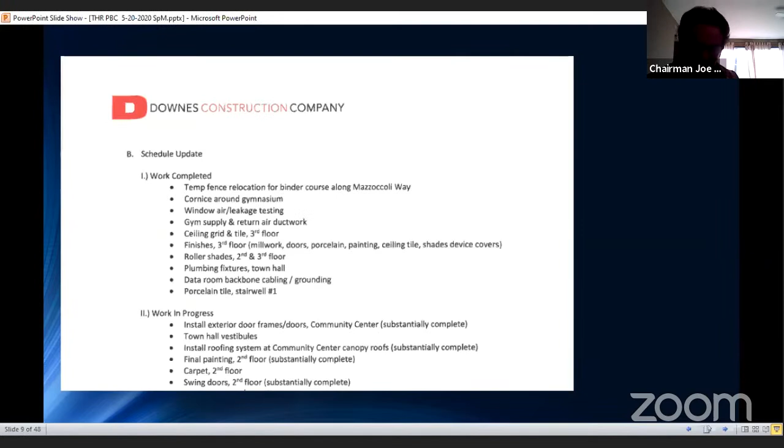Okay, we'll run down the schedule update. A lot of progress has been made. I know it seemed like it took what seemed like an eternity to come out of the ground. Now that we're into the finishes aspect of the project, we're moving pretty quick.

So I'll go through the work completed. I'm really just touching on some of the highlights of work completed since our last meeting, starting with the fence relocation along the east side of the project. We relocated the fence to the other side of the sidewalk, closer to the library. That enables us to do the prep work along Mazzoccoli Way.

The crown molding or cornice, we've installed those pieces around the perimeter of the gym. We were buttoning that work up the last time we met. Now that we have windows installed, we've done the air and leakage testing on the windows. The supply and return ductwork that feeds the gymnasium, the duct sock that is the supply is installed now, and so is the hard ducted return ductwork. That unit has been started up as well.

Now working top down inside the town hall in terms of the final finishes for the project. We're really approaching this starting now at the 3rd floor of the town hall, working our way down and then through the community center to finish off finishes.

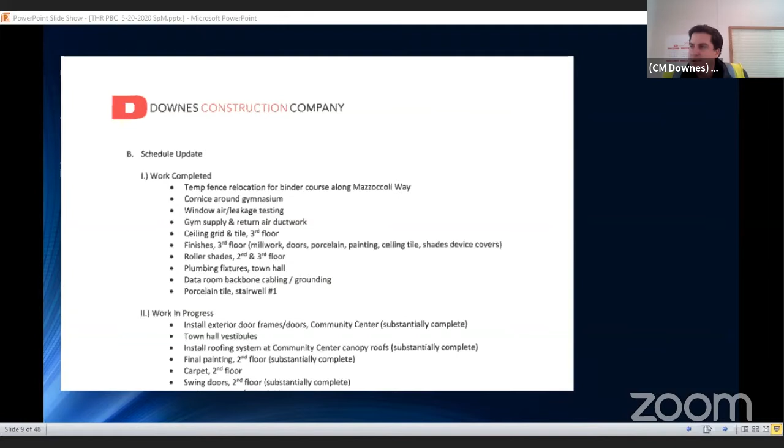Porcelain tile. We also have porcelain tile within the lobby of the town hall on the 2nd floor. We're actually installing that now. You'll see that in one of the photos.

The cab construction, that's a work in progress. Schindler is actively working on the cab. They're probably going to be working on that for the next few weeks.

The ductwork in terms of the HVAC system and doing final terminations of HVAC on the 1st floor, we're substantially complete within the town hall. And we've got a lot of the above ceiling HVAC roughed in within the community center.

Within the Grand Hall, there's a metal panel ceiling system, and we've started the installation of that. We have all the light fixtures energized within the Grand Hall. We have some of the metal panels installed. We're waiting for more metal panels to show up. We're probably a week away from seeing the rest of that material. That's a work in progress.

Drywall and taping in the community center. We are essentially completed with drywall and taping in the Transition Academy and the daycare. We're on our second coat of taping within the administration area of Parks and Rec, and we're now making the corner. We have drywall pretty much all the way down, from the Parks and Rec kitchen all the way down to the multi-purpose rooms. And we're almost to the top of the ceiling with sheetrock and taping within the art room. They're going to be wrapping up sheetrock and taping this week to finish that off.

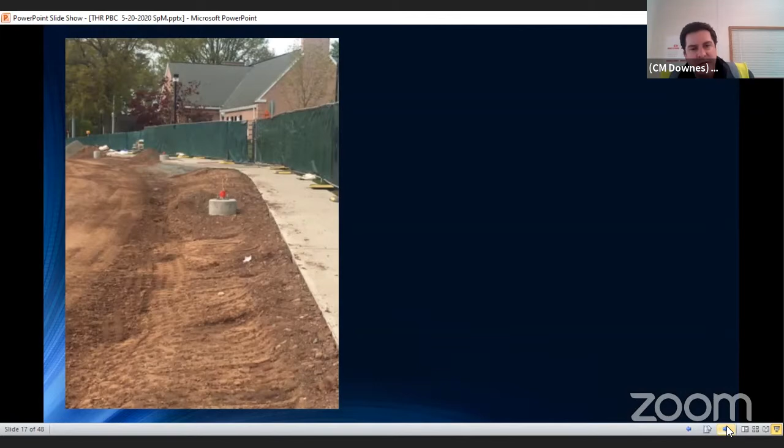Okay, next one. This is a shot looking down Mazzoccoli Way towards Cedar Street. You can see the fence relocation I mentioned earlier, moving it closer to the library, and one of the light pole bases we've already set. This was last week, so if you looked at it today you'd see a lot of progress as we prepare for binder course next week.

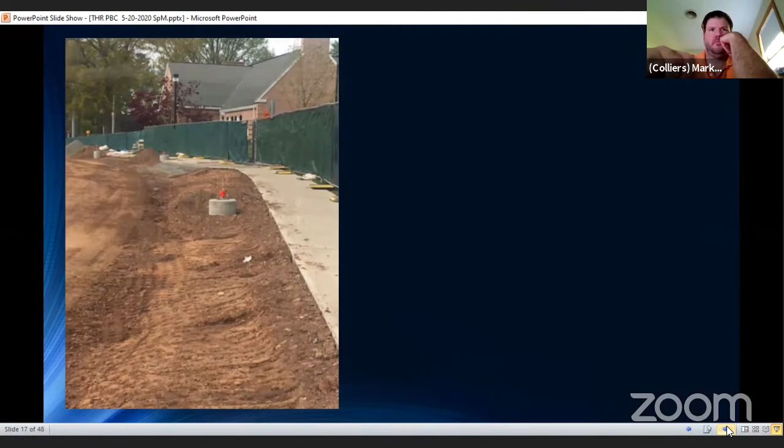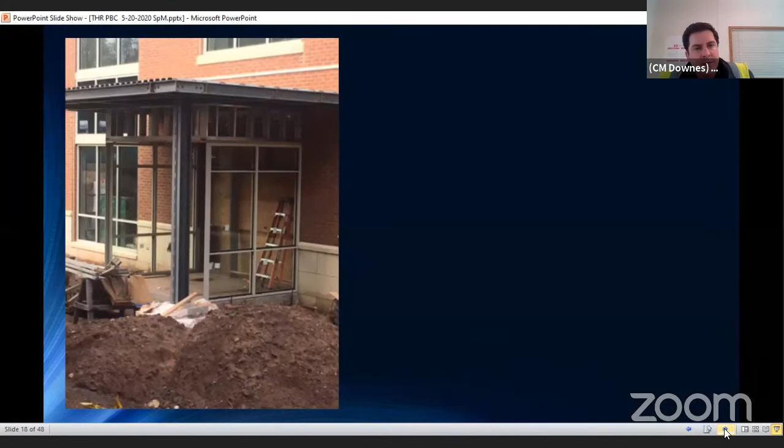All right, that's a close-up of one of the entries along the town hall. We're building out the little vestibules—this is typical on both sides of the town hall. It gets an aluminum storefront entry system, and we'll have a set of double doors on the front. The guys are actually setting these openings now, doing that this week to get it buttoned up.

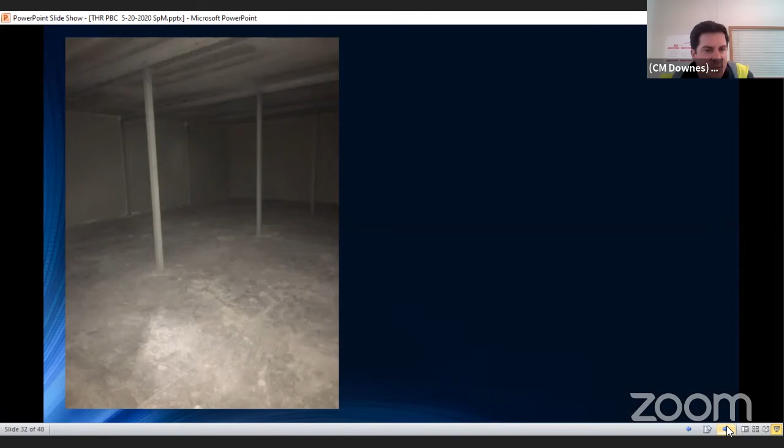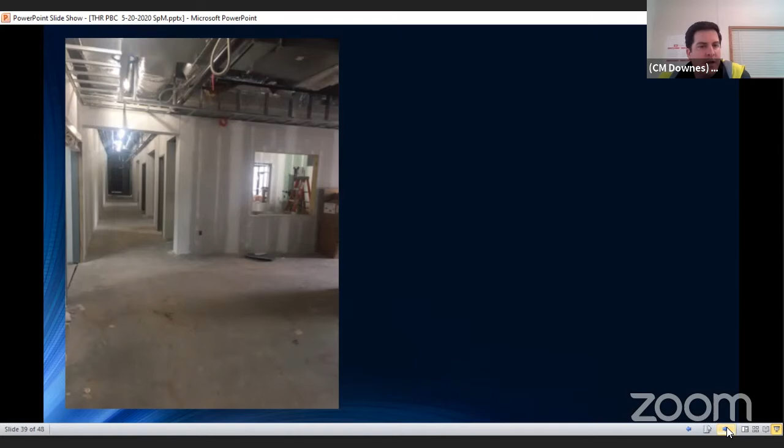And now we're still in the community center in the other corridor going around the corner. We're now on the south side. So the rooms off to the right include the Parks and Rec kitchen, and then beyond that is the multi-purpose rooms. And beyond that, at the end of this hallway is the art room.

Okay, thank you, Frank. We'll now go to a presentation on landscaping and planting layout for the new facility. Chris?

Hey, Joe, can you hear me? Are you there, Chris? Can you hear me? Yes. Yes, okay, good. Which one do you want to start with, Chris? Let's go with the, I think there is a landscape plan that's not colored in. Okay, give me a second. So that'll be the planting plan? Yes. Okay.

The public's edification is a presentation by Quisenberry Arcari, the architectural firm on the job, and they're going to go through the presentation on landscaping and plant layout.

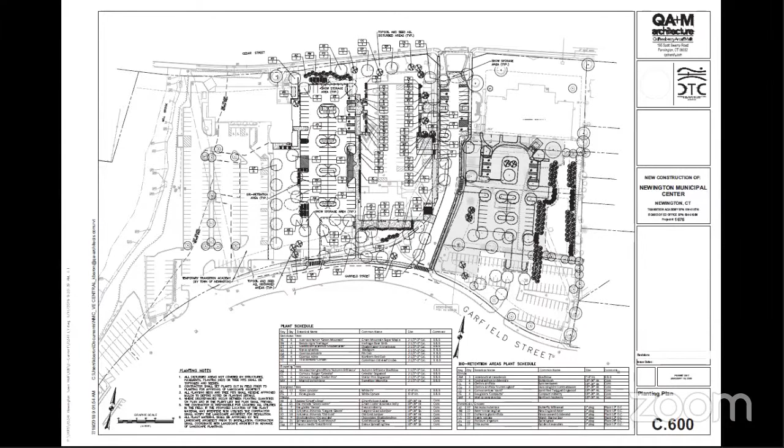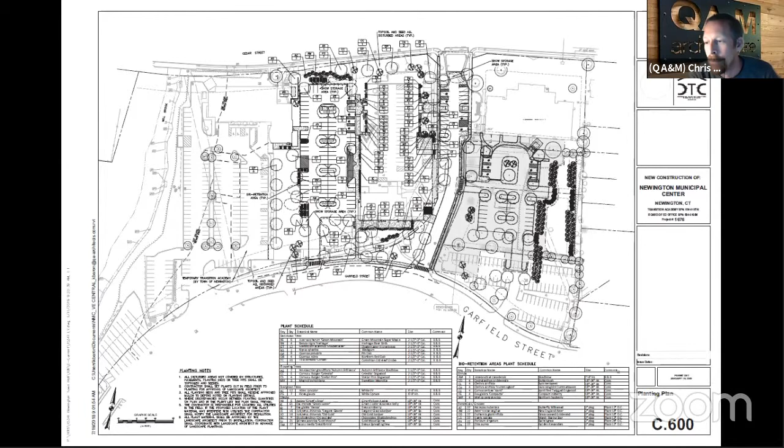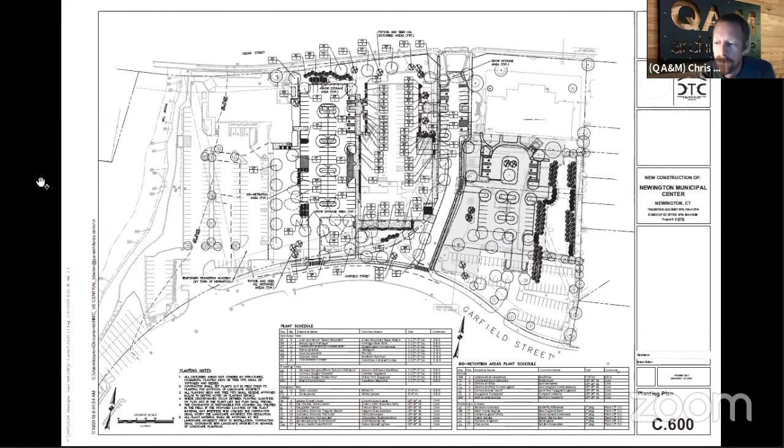Okay, what you're looking at right now is the contract planting plan for the overall site that includes the parking lot, the building proper for the new town hall, and the library portion of the job that was previously done. So you're seeing the overall campus here on this plan. And then if you zoom in on the text at the bottom, there is some plant schedule information there - you can see what type of plants there are, and it all has a key tag to it. If you're looking at the left side of your schedule, the key tag is 2 letters typically, and it identifies each of the plants that are on site, so you can identify which plant is which on the plan.

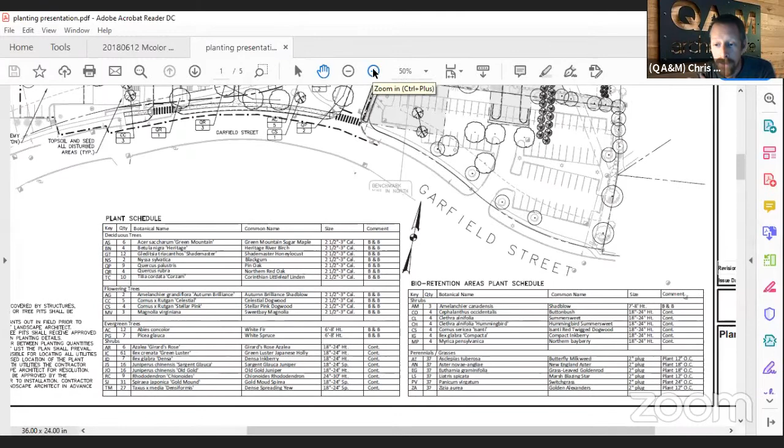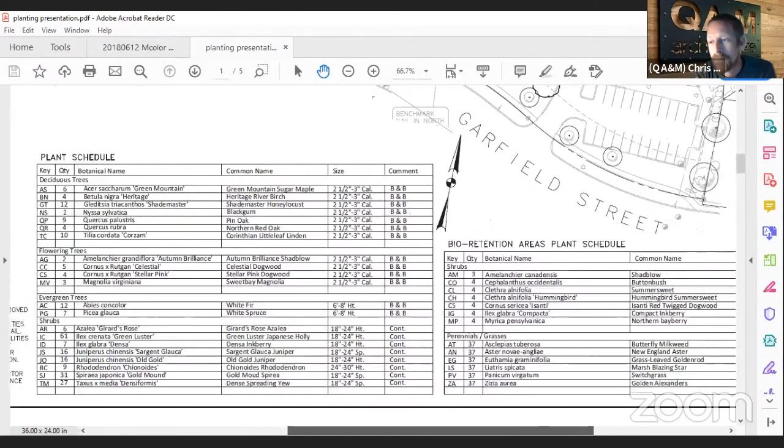So this is the plan that Downs is following currently. There have been no real changes to this based on anything to do with the property line or the gym bump out. So the original contract plan is still in place for the site plantings.

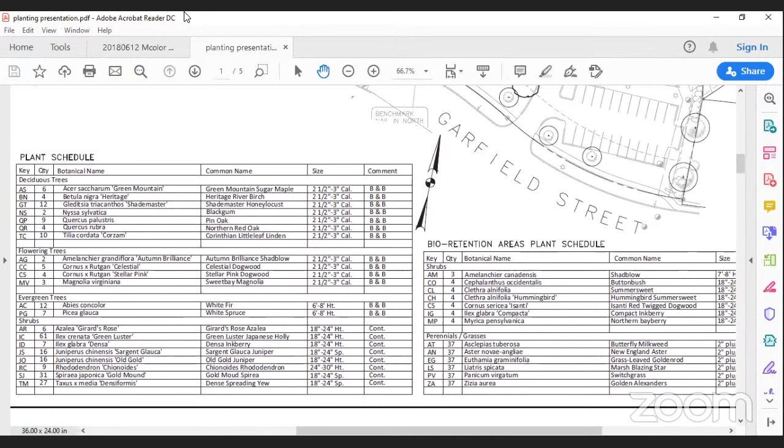So if you go to the next plan, this is a closer look at just the building itself, showing the surroundings of the building as to what plants are which. Again, there's a plant schedule on your left. There's no tags on this plan, just to keep it a little cleaner and give you more of a defined view of the count of plants and where they are. So you can reference this sheet and the previous sheet if you want more information on exactly which plant is there.

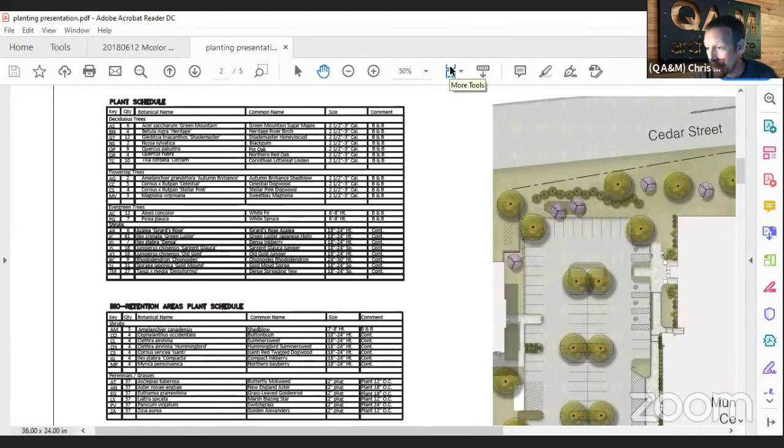Generally, the larger circles are your trees, which you'll see in the following slides. We'll show you some of the tree options in various places on site. The smaller purple items indicated are flowering trees, and you'll see which trees those are in the images on the next few slides.

As you get a little closer to the building, we have smaller shrubs and flowering plants that are lower, and those will be on the next slides as well. So that's the general overall view of the plantings. You've all seen a similar presentation early on, so this shouldn't be new information, just a little cleaner hopefully.

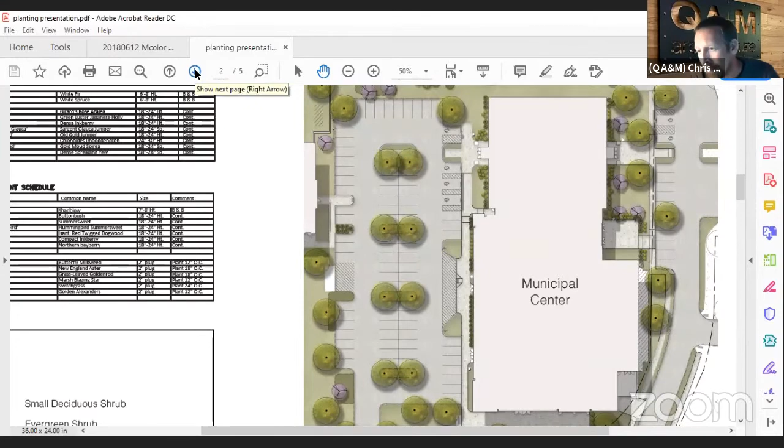The next three pages will give you the actual image of each individual plant type and their corresponding key tags. So if you go back through the first plan, you'll see a 2-letter tag pointing to each individual plant and a count of those plants, so you can identify what plant is where, to get a more defined view of what these plants will look like once established.

So we started with the trees, then went to larger plantings, and then down to the smaller flower plants on the second and third page of these planting images. That's a general overview of the planting plan. Like I said, no real changes overall to the plan since its inception at the beginning—we're just showing a more defined plan of what's going in there for your information.

Are there any questions of Chris?

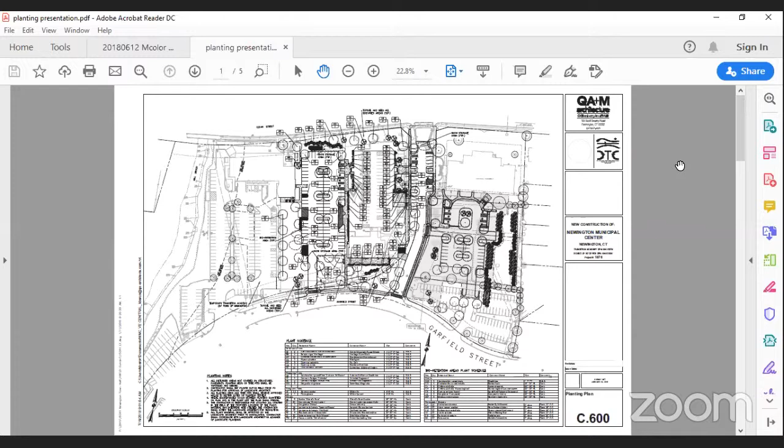Joe Harpy: in terms of what we're looking at right now, when the landscape architect came in many months ago with Mr. Arcari, I thought there was some design, and perhaps when we did the revised property line, there isn't any room now with the retaining wall etc. Was there or was there not some public gathering area designed in front of the new town hall, as you look at it from the library across, looking west?

At some point there was a plaza area at the south end of the building, kind of like an amphitheater layout. I think with the revision of the property line, that portion had gone away based on value engineering and the property line layout. Is that what you're referring to? Yes—where it was, right south of those three meeting rooms? Yes.

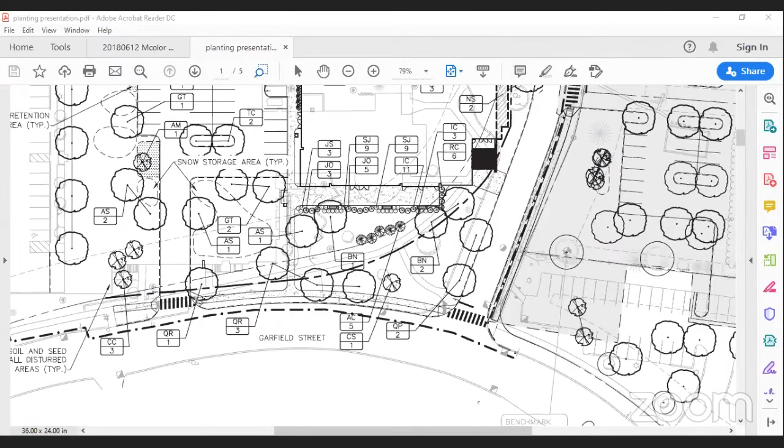Okay, and this design that we're looking at, does that account for the settled width of Mazzoccoli Way? Currently, if you look at your screen, there are two trees on the left side of Mazzoccoli Way. Those trees are technically in the right of way, I believe, for Mazzicoli, but I don't think they'll be impacted if there's a desire to widen that roadway and open up Mazzicoli. As you remember, the sidewalk runs down along that side as well.

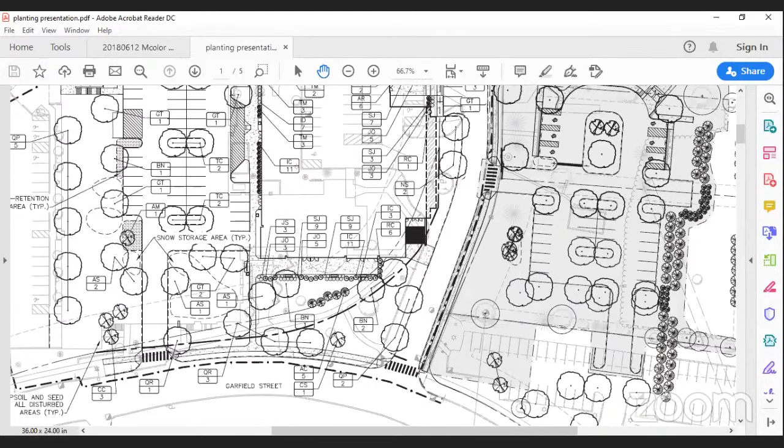If you go to the colored plan, it shows the sidewalk that got added as part of the 824. So you'll see that sidewalk. Those trees may have been shifted on this plan a little to the west to get it off the sidewalk, but the intent is that the sidewalk remains as part of the Mazzoccoli Way right-of-way if that ever does open. So those trees should be able to remain in place.

Okay, thank you. Are there any questions from the committee? Joe, if I could real quick.

Yes, Mr. Minor. Chris, on the final—that south end gathering area that was originally scoped with a retaining wall and a bit more of a patio area—that's all now sloped and going to be grass all the way down to the sidewalk on the exterior of the building, correct?

Correct. Yeah, it still has the ability out there to have seating on the lawn area for a presentation on the concrete sidewalk, if that was desired, correct?

Yeah, and what you're not seeing on this too, Chris, is it's kind of like a bowl shape there, because you're going from the higher elevation, continuing around and stepping down to the lower elevation of the lower level of the town hall. So there's kind of a bowl shape there in the grading. I don't know how steep it will be at final grading, but it will make a little lawn area that's sloped toward the concrete patio.

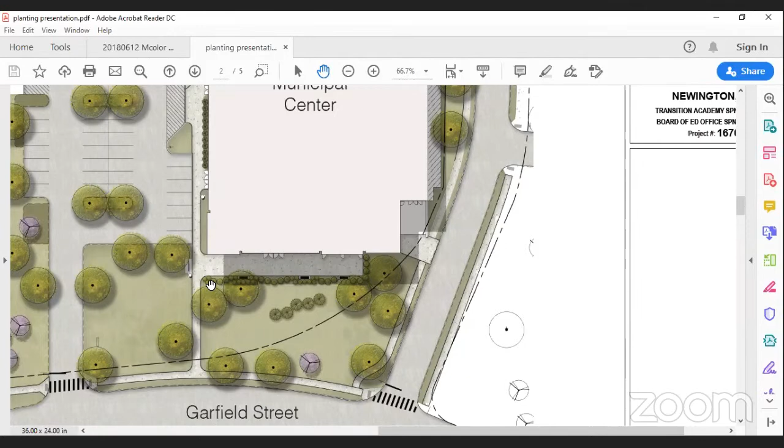The other plantings south of that little grouping, near the slope area where you may be able to sit, seem to be encroaching on the sidewalk. Is that the proposed extension of the existing sidewalk? Right. I'll take a look at what exact plants are in there and what their heights are, and if they look like they might interfere, I think we should look at relocating or removing them from the scope.

Are there any questions? Chris, Mr. Chairman, Mr. Boutot has a question. Yes, please go ahead. Joe Paul Boutot from IT.

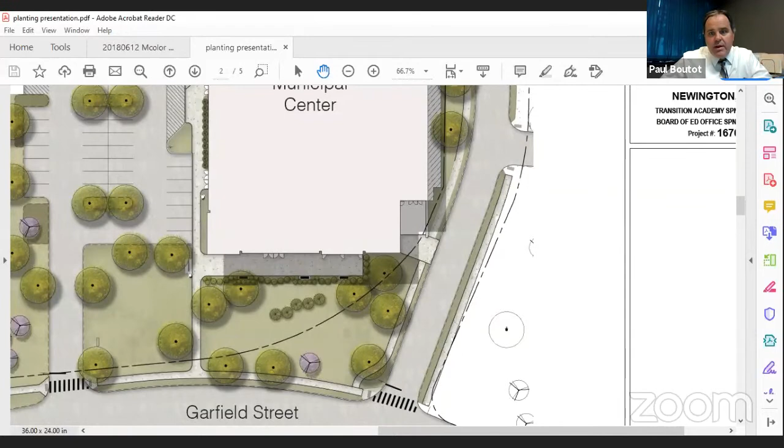I had a question on whether QA&M or the landscape architect has looked at the fiber optic pathway we have along the north corridor, coming down between Mazzacoli and crossing that green area towards Garfield. There's going to be some work done along that. I wanted to see if anyone has overlaid the fiber optic conduit pathways to see what impact these trees may have on their root systems and whether they might compromise the fiber optic conduits in the future.

Paul, I don't think anybody had taken a look at that, but we'll put it on our radar to take a look.

We just had a breach over on the Senior Disabled Center across the street. We actually have a tree that compromised one of our conduits in the ground. Looking at where a lot of those trees are located now, especially on the north end of the property and the south end of the property, you're definitely going to have 4-inch conduit pathways that'll be breached at some point by the root systems.

Okay, we'll take a look at it, Paul. You have anything else, Paul? That's it, thank you. Thank you. Joe, this is Frank at Downes.

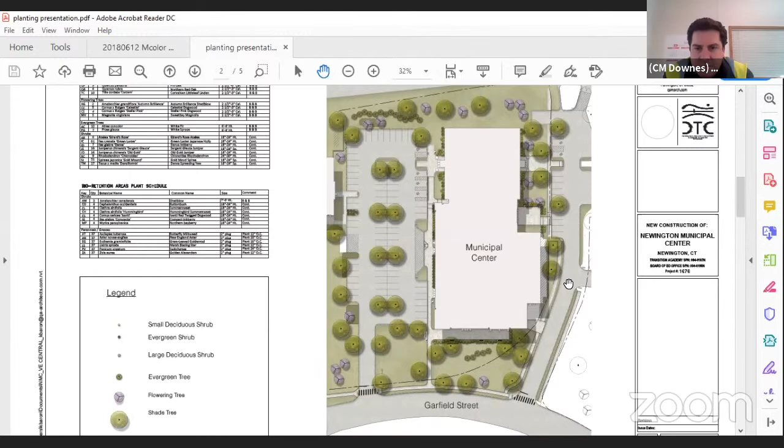I just want to clarify something Chris pointed out on this plan we're looking at: the sidewalk along the east side of the building at the gymnasium bump out. Currently, we don't have any plans to do a sidewalk there. I know Chris is showing a sidewalk. At one point we presented a proposal to add that sidewalk, but it was not approved. So there's currently no provision in our contract to address that sidewalk. That's true.

That's an issue I think the town is going to look at post-construction. I think, if I remember correctly, Joe, Chris, Minor, there was some consideration when the Garfield project was done for pedestrian and cycle accessibility that this could potentially be incorporated into it. I believe that was the intent.

Chris, you've had several good questions posed to you that you've answered, and if you can recalculate some of the locations of those plantings and give us another look at that before July, so we can see where we're going. It's a tight campus, no doubt about it. So I guess smaller growth for the future is better than bigger, but they have to be replaced or eliminated if they throw off the aesthetic view. But we appreciate the update, it's important to us.

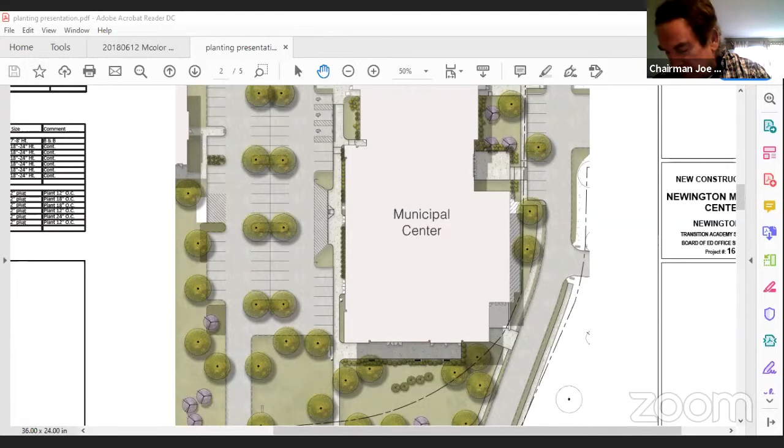Okay, we've already taken care of Roman numeral 7, the change orders, and we would now go to consider and take action on fund transfers, if any. Mr. Barron? Since this was a credit, there are no fund transfers required. Thank you. Any other business pertinent to the committee?

Not unless you wish to pick your next meeting date. Your regular meeting date is scheduled for next week, May 27th. Your next regular meeting dates after that are June 10th and June 24th. Do you wish to meet on May 27th?

Does the committee prefer to wait to June 10th when we have more information? On June 10th, the building? Yeah, I think June 10th, Chief. Yeah, Downs would prefer that as well. Okay, we'll go for June 10th, Mr. Barron. Very good, thank you.

No other business. Okay, public participation. Any member of the public wishing to speak, please state your name and address. Do we have anybody in the queue, James? We still have our two attendees, but nobody's raised their hand as of yet. Okay.

All right, moving to comments by committee members. Any member of the committee wishing to make a comment on any of the proceedings or actions this evening?

I just, June 10th, same format as tonight? Yes, hopefully without the presentation from the architect on landscaping. Okay, and without the... well, we'll leave it at that. Okay.

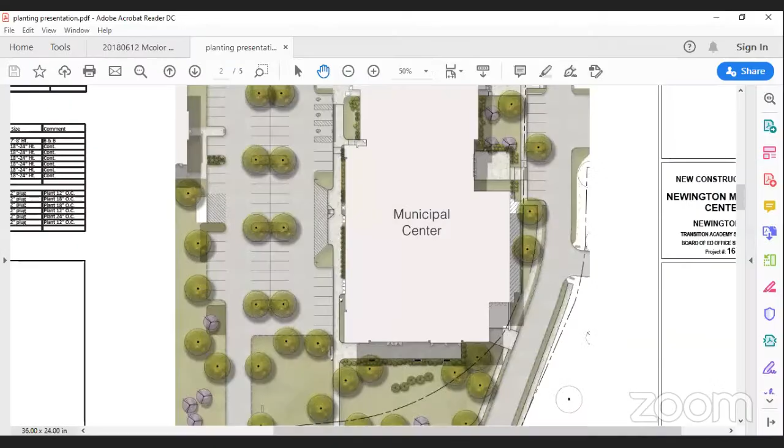The other thing was mentioned a little bit, I think by Chris Minor. If you're looking at the south side of the project from the right on the Garfield line, I think what has to be kept in mind is that if there is any kind of patio or even hillside seating area, about 5 or 6 of those trees along the edge would impair, I believe, viewing of our biggest event in town, the Life Be In It, just across the street. I'm not sure how, without actually standing on the site looking at it, I think that needs to be taken into account, whatever ends up being planted in that area.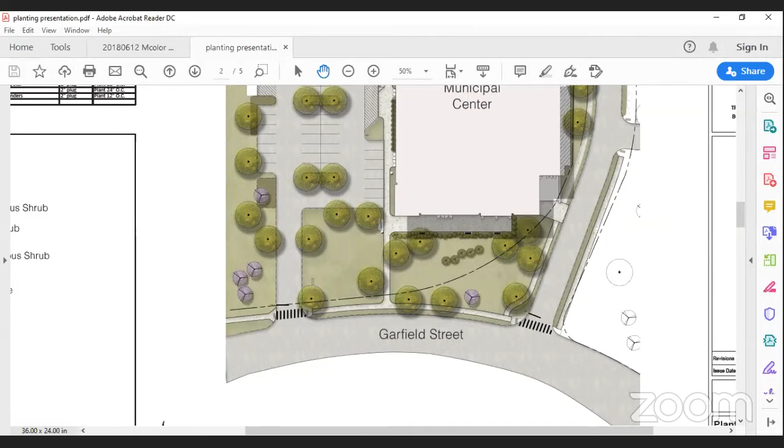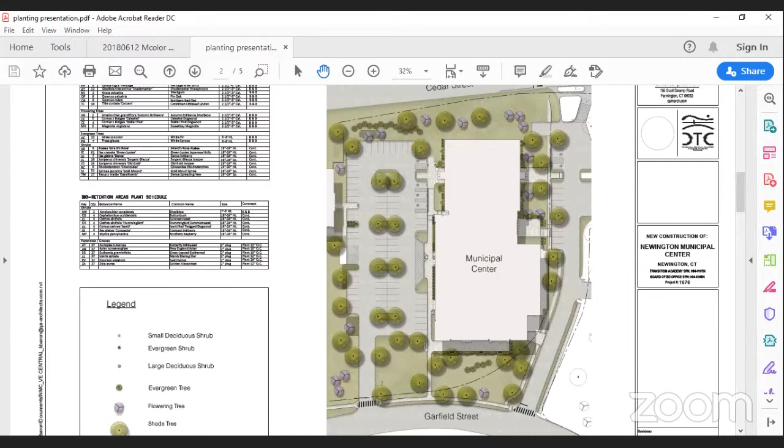I'm assuming the third part of that is looking at heat gains on the building from the south side and the west side, that wherever possible, without overtaking the building area, plantings that would help provide some kind of shade to prevent heat gain, which is huge. If you go by the town hall on a later day, you can feel the heat emanating off of the brick, how much heat it retains. So just some quick comments, I don't want to get into it, but I'll stop and talk to Don afterwards. Like I said, he's the expert, not me, but I just wanted to bring that up.

All right, thank you, Rod. Okay, entertain a motion to adjourn. Make a motion to adjourn. Thank you, is there a second? Second, Anthony Claffey. Any discussion? All those in favor? Aye. We stand adjourned, thank you very much.